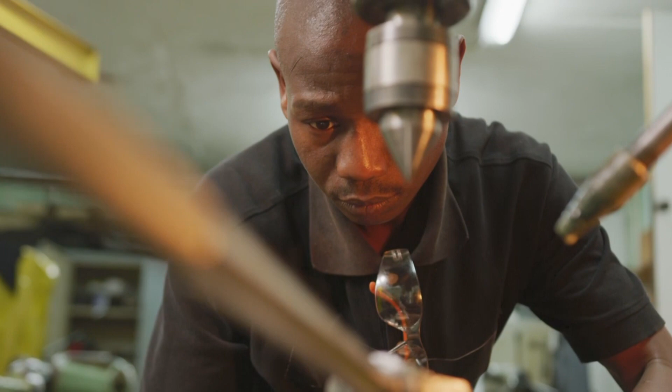For more than 2 centuries, the rules of manufacturing remained remarkably consistent. If you wanted to produce something, you needed a factory.

You needed expensive machinery, specialized tools, production lines, warehouses, and large quantities of raw materials. The economics were simple: the more identical products you manufactured, the lower the cost of each one.

Mass production became the foundation of modern industry, and nations that mastered it became the economic giants of the world.

We know, of course, Nigeria is ensuring that they also key into global development. And for us, we believe we are playing a part in that at Innov8, being a research-to-prototype-based organization.

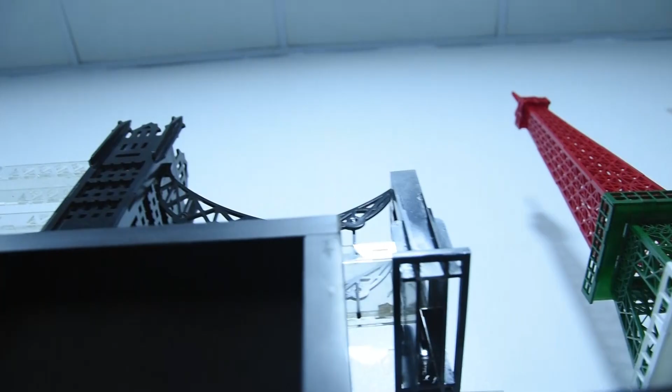This is an avenue to boost our capacity in indigenous development, not having to go outside the shores of Nigeria.

To import equipment, anything that may be needed within the country for manufacturing, for developments in civil engineering, in mechanical engineering and the likes. This ensures that we have the capacity within Nigeria to build this equipment or to build what is necessary.

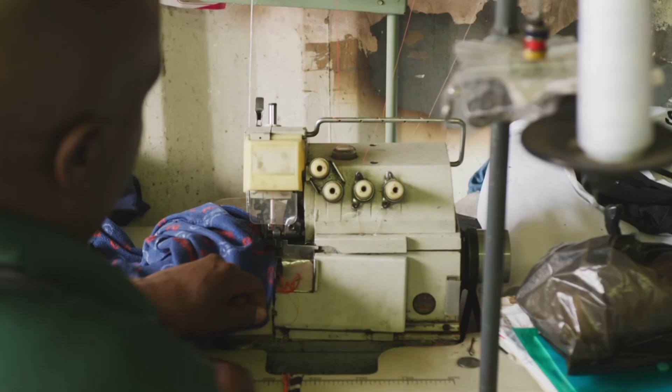From automobiles and aircraft to household appliances and medical equipment, almost everything around us followed this same principle.

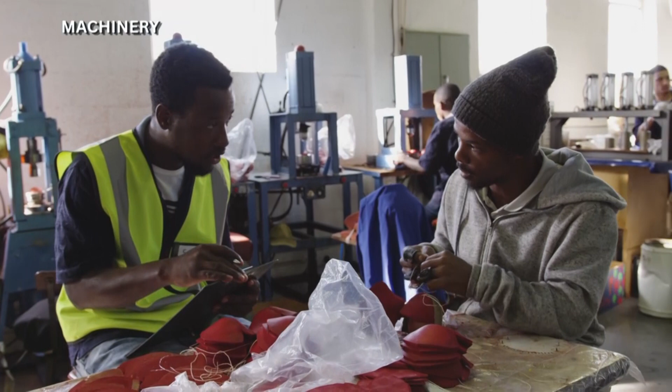Designs were first translated into molds, dies, or specialized machinery before a single product could even be manufactured. Building those tools often cost millions of dollars, meaning innovation itself came with a high price.

Only companies with significant resources could afford to create, test, and manufacture at scale.

For generations, this system worked remarkably well. It gave the world speed, consistency, and affordability. It built industries, created employment, and transformed economies.

Yet, beneath its success lay a quiet limitation. Every new idea demanded new machinery. Every design change required new tools. Every mistake meant wasted materials, lost time, and additional costs.

Manufacturing had become powerful, but it had also become rigid.

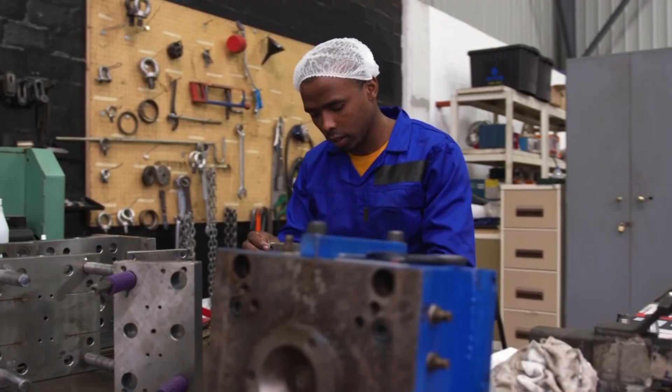Then something unexpected happened. Not inside the world's largest factories, not on the busiest assembly lines, but inside research laboratories, universities, and innovation centers, where engineers began asking a remarkably simple question.

What if objects didn't have to be carved, cut, pressed, or molded into existence? What if they could simply be printed?

For decades, the idea sounded almost impossible. Printing belonged to paper, manufacturing belonged to factories. The two worlds had nothing in common. Until they did.

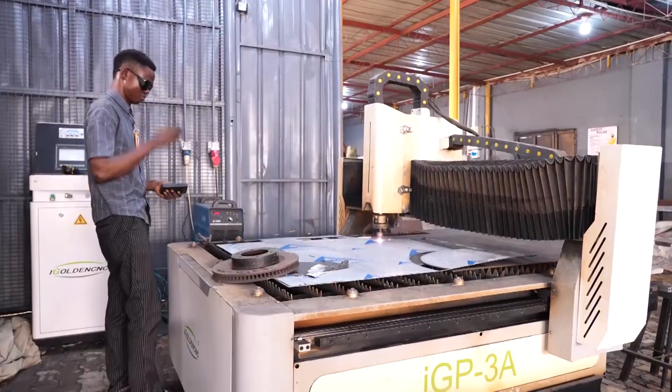What emerged was not merely another machine or another production technique, it was an entirely different philosophy of manufacturing.

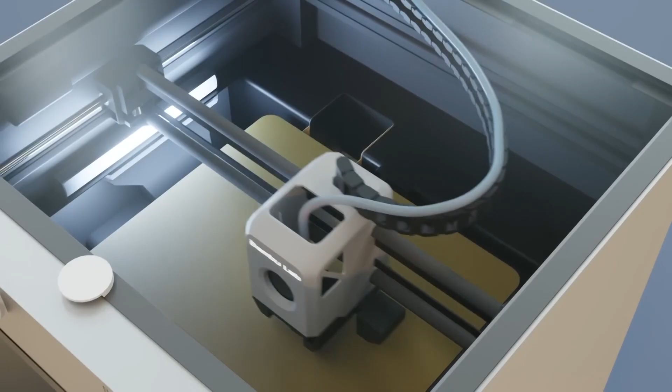Instead of removing material from a larger block or forcing molten material into expensive molds, this new technology would build objects layer by layer, adding material only where it was needed, guided entirely by a digital design.

The world would come to know it as additive manufacturing. Most people simply call it 3D printing.

We normally call it additive manufacturing lab. Yes, because we manufacture component parts, functional prototype, rapid prototyping.

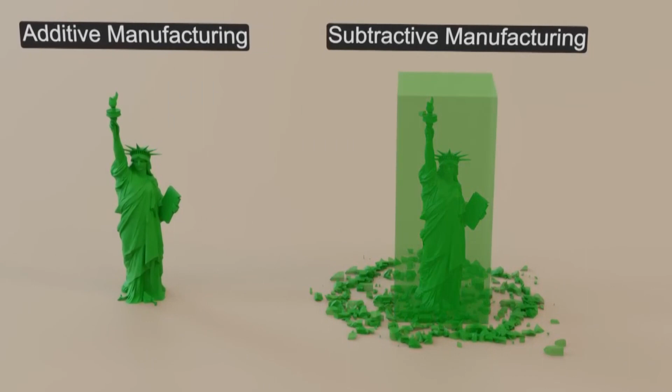Yeah, this is the lab that gives us what we want. First, the client comes with their ideas.

Yes, we'll map the ideas from their head in form of a digital file. That idea that's in your head, you will see it in the computer. Then after which they move to this place.

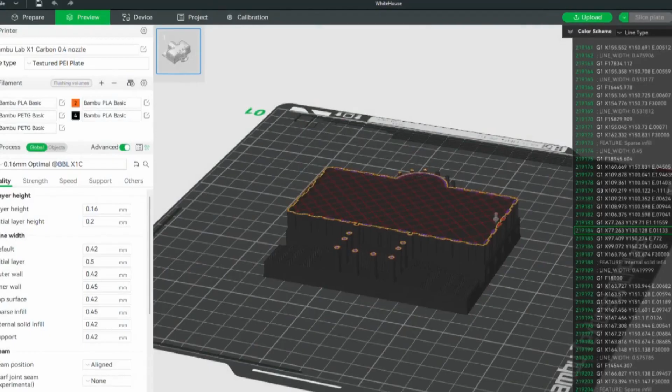From here now we get the file as an STL file, slice it. Slicing it is converting that digital file to G-code. G-code is the language that the machines understand, of course. So converting it into G-code, you slice it. Slicing means you give commands, a set of algorithms. Of course, the computer will now read those algorithms and manufacture exactly what you want to manufacture.

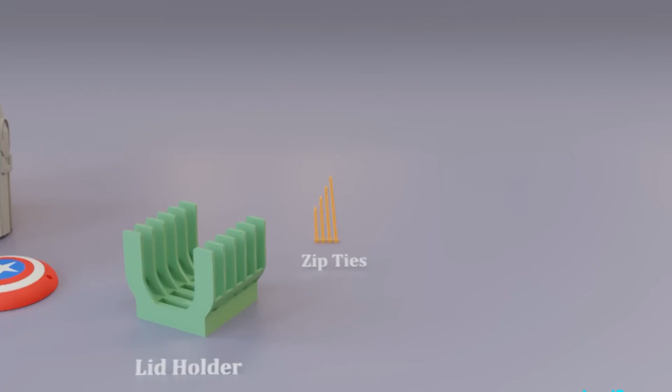Perhaps the biggest misconception about 3D printing is that it's simply another type of printer. It isn't. It represents something much bigger. It changes the relationship between imagination and manufacturing. For the first time in history, having an idea no longer requires owning a factory before you can build it. Yeah, that changes everything. And that everything is already happening.

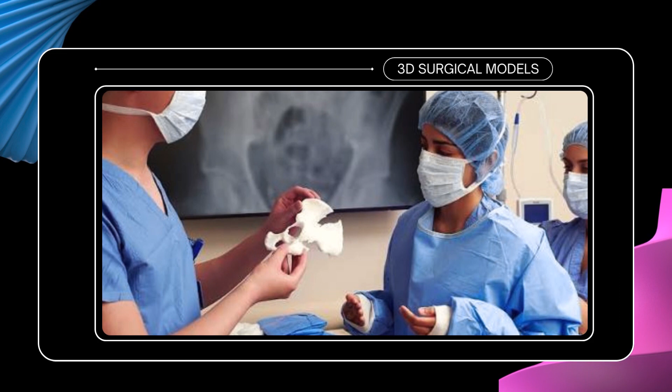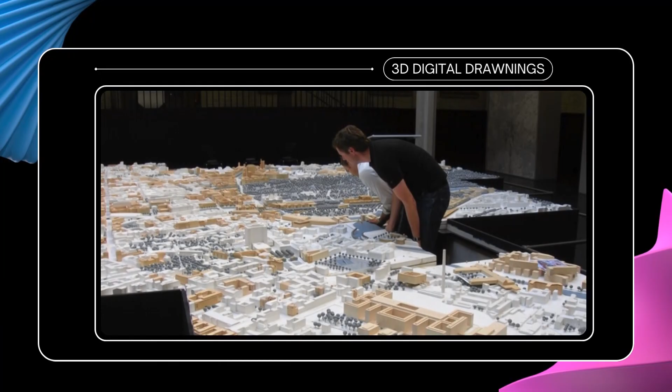Aircraft manufacturers now print lightweight engine components that are stronger than traditionally manufactured parts. Doctors print patient-specific surgical models before entering the operating theater. Dentists produce custom aligners and crowns with astonishing precision. Architects transform digital drawings into physical scale models within hours instead of weeks. Fashion designers experiment with wearable structures impossible to sew by hand. Scientists are developing printable human tissues.

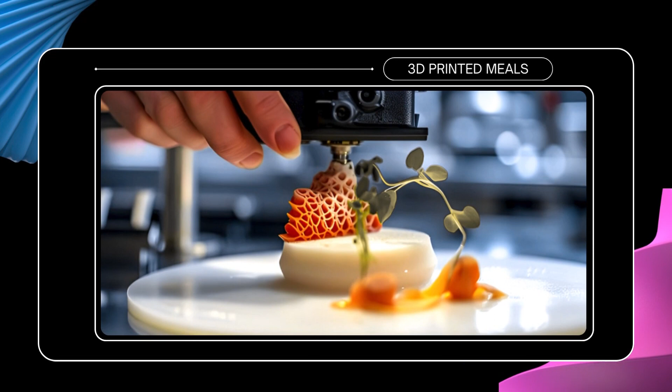Engineers are building homes. Food technologists are experimenting with printed meals. Even space agencies are studying how astronauts could manufacture essential tools millions of kilometers away from Earth instead of waiting for supplies from the ground. This is no longer a technology searching for an application. It is a technology quietly entering almost every industry.

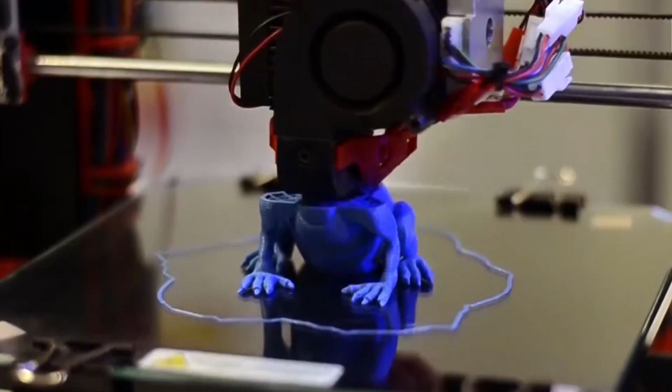Which raises an important question. If countries around the world are redefining manufacturing through additive technologies, where does Nigeria stand in this new industrial revolution? And perhaps more importantly, who is preparing the next generation of Nigerians to become builders of that future? That question brings us here, to a place where ideas are no longer confined to computer screens, but are beginning to take physical form. Innov8 Hub.

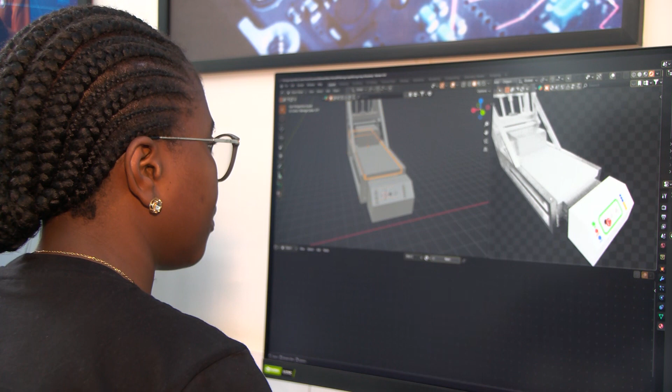Across the world, governments, universities and private institutions are investing heavily in additive manufacturing, not simply because it is new, but because it represents a different way of thinking. They understand that tomorrow's industrial leaders may not necessarily own the largest factories. They will own the brightest ideas, the most advanced digital skills, and the ability to transform those ideas into products faster than ever before. Today, a research idea is not yet real, it's still in the archive, but you can build it to become a reality.

Today's world is professionalism. Today's world is not just academics. Today's world is professionality. Today's world is impact. Today's world is product to impact, research to impact.

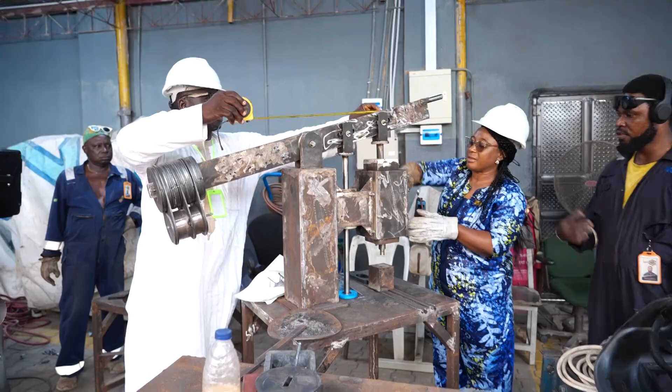That realization is reshaping education itself. Around the world, fabrication laboratories are becoming as important as traditional workshops. Students are no longer encouraged to memorize concepts alone. They are challenged to design, experiment, fail, improve, and build. Because innovation is no longer measured only by knowledge, it is measured by the ability to create.

Here in Abuja, that same philosophy is beginning to take roots. Behind these walls is more than just another innovation center. It is a place where imagination meets engineering, where digital ideas become physical objects, and where young Nigerians are learning that manufacturing is no longer reserved for giant corporations.

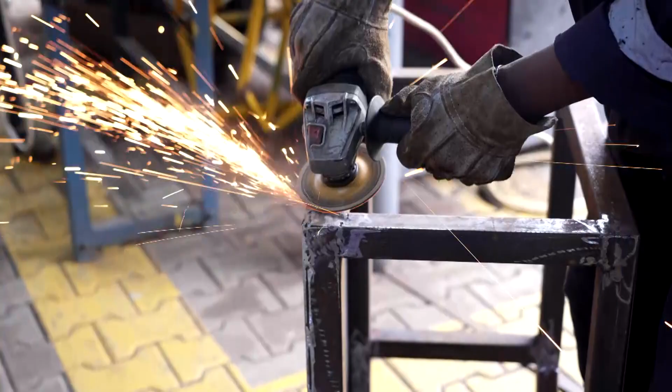This is Innov8 Hub. We act as the bridge between ideas and the market, enabling inventors to test, to iterate, and launch real products that actually solve real problems. Established as one of Nigeria's leading innovation and technology centers, Innov8 Hub was created to nurture a culture of creativity, research, entrepreneurship, and practical problem solving. Rather than simply teaching emerging technologies, the Hub provides innovators with the environment, equipment, mentorship, and collaborative spaces needed to transform ideas into working solutions.

When you go downstairs. Its mission extends beyond technology itself. It is about empowering Nigerians to become creators rather than consumers, equipping them with the skills to compete in an increasingly digital and innovation-driven global economy.

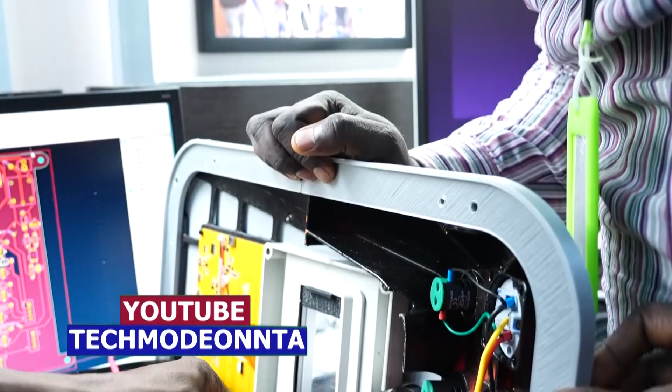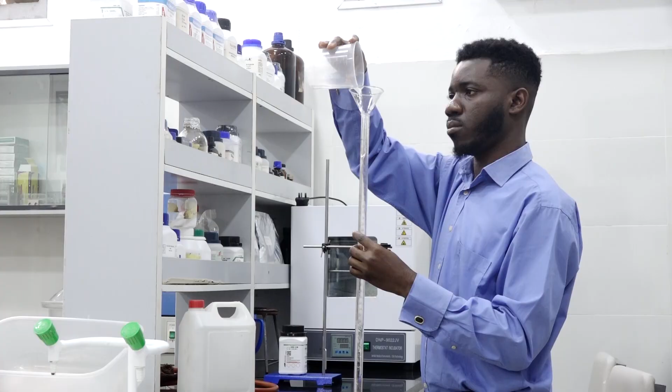Here I've seen tiny whispers of ideas being translated into massive products and prototypes, all by Nigerian experts in all ramifications: IoT, electronics, embedded systems, simulation, product designing, creative media, even upcycling, recycling, and 3D printing technology. You've seen things they've been producing, prototyping, creating out of the hub. We've seen individuals from here who won NASA competitions, and individuals from the hub who won IEEE competitions. These organizations are based in the US.

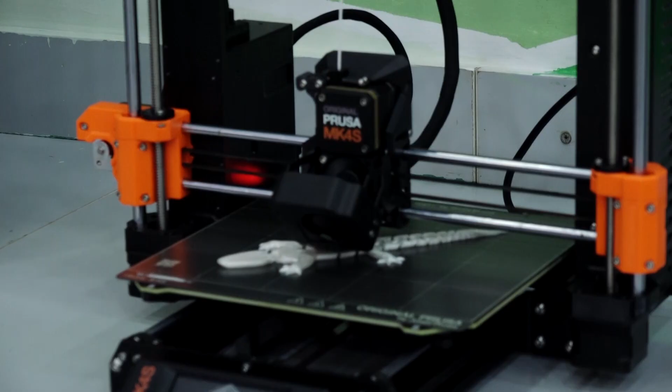Recognizing the growing importance of additive manufacturing, Innov8 Hub has continued to expand its capabilities through strategic international collaborations. One such milestone came from a partnership with the Embassy of the Czech Republic, facilitated under Czech Aid, to establish and strengthen a dedicated 3D printing and fabrication center.

Actually, we get involved through the private sector, concretely through Prusa Research, who already provided his machines to Innov8 Hub before. We were asked to get in touch with them and try to develop collaboration. So that's how I got in touch with the management of Innov8 Hub, and later on I had the opportunity to visit the center myself, the facilities, and I was deeply impressed.

Very much, thank you. Over the years with Prusa, one of the leading 3D printing developers in the world, based in Czech Republic, they've been supplying the 3D printers. We have a partnership with them, and with that we have the 3D printers we use in the lab.

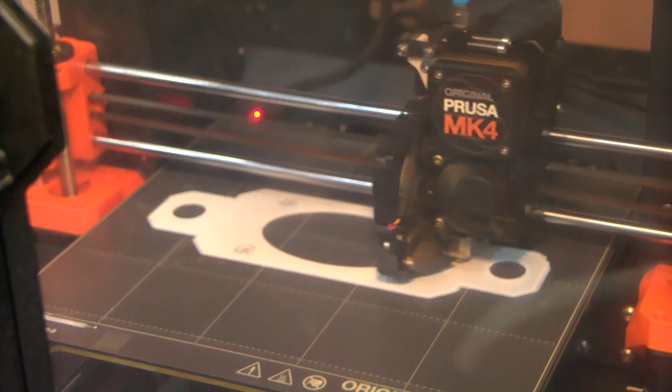As an offshoot of that is also the partnership with the Czech Republic, which is being chaired by the Czech Aid Development Agency, and headed by the Czech Republic Embassy here in Abuja. So this 3D printing program is born out of that partnership to see how we can take emerging technology, and 3D printing is one of it, beyond the scope that it currently exists in Nigeria.

The collaboration represents far more than the donation of equipment. It is an investment in knowledge transfer, technical capacity, and the development of local expertise. It reflects a shared belief that sustainable innovation begins by equipping people with the tools and skills to solve problems for themselves.

From my short experience here as ambassador in Nigeria, I know one thing for sure, that Nigeria on one hand is a country with many challenges, let's be open, but at the same time it's a country with huge potential, and most of this potential lies in its people, especially young people. So to make full use of this potential, it is necessary in the first place to create jobs, highly qualified jobs for those young people, and to diversify the Nigerian economy.

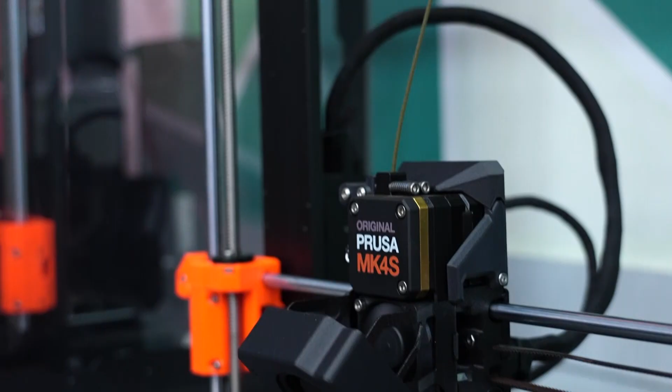I'm sure in the long run Nigeria will succeed in this long project, and for that reason I'm really happy and proud that our government and our embassy could make this small contribution to this long-term goal. I'm sure you will succeed. So good luck and God bless.

International partnerships like this have become increasingly important. Technology evolves at an extraordinary pace, and no nation advances alone. Collaborations enable countries to exchange knowledge, accelerate innovation, and expose young people to global best practices. But machines alone do not transform societies. People do.

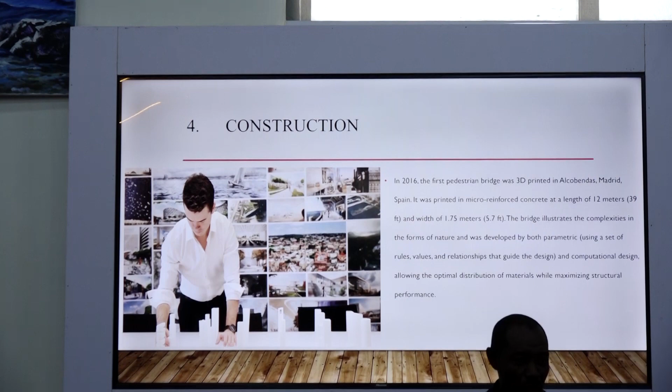That philosophy came to life during the 3D printing and fabrication training program jointly organized by Innov8 Hub and the Czech Embassy. Based on this partnership with the Embassy of Czech Republic in Nigeria, we are going to be training 50 individuals, Nigerians, around 3D printing technology.

Let me speak a little bit about the training and capacity building component of this project. Each cohort will be trained for 3 days. We have segmented the training into 3 arms. First, basic level—because if you don't have knowledge of 3D printing before, you're just aware that it exists, basic will take you from the level of awareness to some knowledge in 3D printing and some ability to print.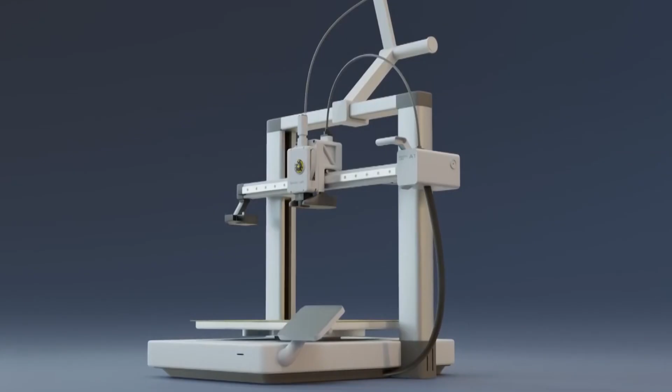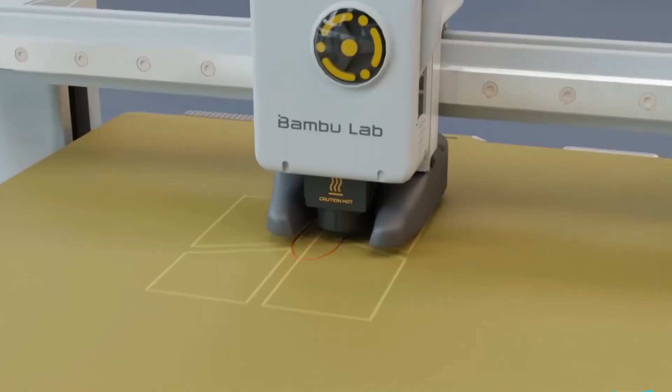The next level is intermediate. After you're at the basic level, you move into the intermediate level, where you can manipulate designs, do little designs on your own, work on the printer, set it up, know how to feed the printer, and do some level of troubleshooting. Then the third segment of this training is advanced. After the intermediate, you move to the advanced level.

Students, researchers, engineers, designers, entrepreneurs, and technology enthusiasts gathered not merely to observe a new machine, but to understand a new way of thinking.

Well, I'm excited about the hands-on training that I will undergo because as a lecturer, the more I'm equipped and skilled, the better for my students and the better for the development of the younger ones. I would say that it is a very good opportunity to be used in my organization to build and make prototypes of different things. In the defense sector of Nigeria, it could be used in so many different ways, in the aerospace, in the maritime, and in land.

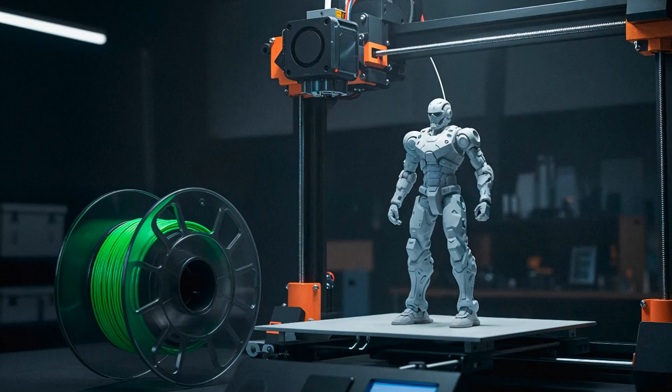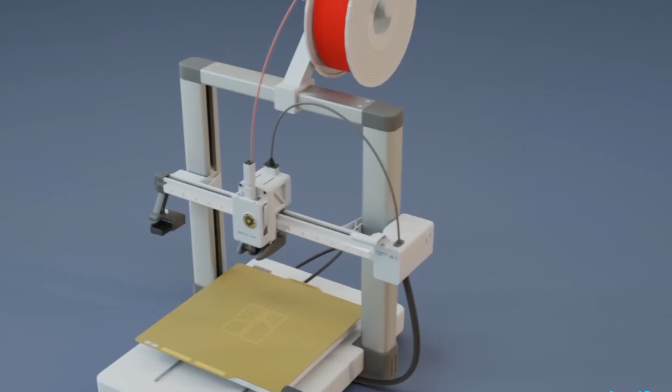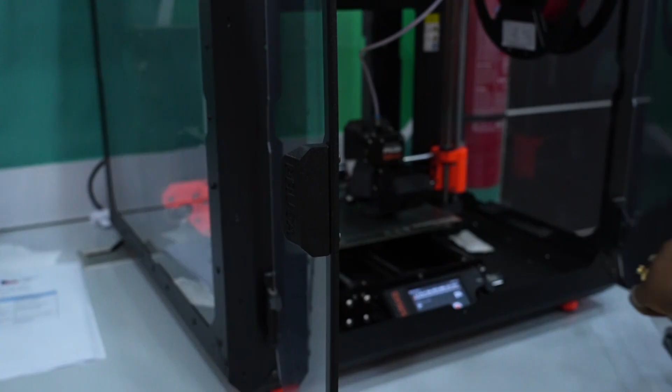Inside the fabrication center, participants explored every stage of the manufacturing process, from digital modeling and computer-aided design to printer calibration, material selection, slicing software, and post-processing techniques. For many, it was their first opportunity to witness a digital concept gradually emerge into a tangible object, layer by layer.

Using 3D printing systems makes it possible that we can replicate parts very easily, and it helps in things we created, making it come to fruition. We make it available. No matter the kind of design we think we want to create, we'll be able to use a 3D machine to make it come into life.

Yes, if you go to universities in the country, you'd find that there are lots of researches that are just packed on shelves as STEM papers, as publications. A place like this breathes life into them because aside from the equipment, it is also a networking hub. This is a space you could come to and be meeting with international organizations, other universities, embassies, and so on.

Yet, perhaps the greatest lesson extended beyond the machines themselves. Participants discovered that innovation is rarely about having access to expensive technology. More often, it begins with curiosity, creativity, and the willingness to solve problems differently.

Being here is the first step, getting knowledge, and then what I intend to do, which is in my field, is teach the students, going back to my university, teaching them from the designing, prototyping, to actually bringing out what they actually want for their project. The first, more like having a working prototype for their projects.

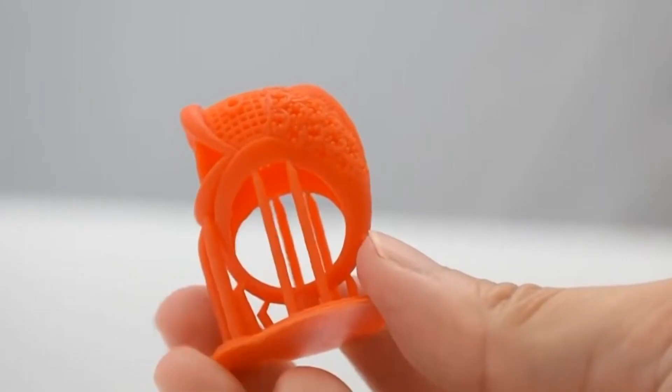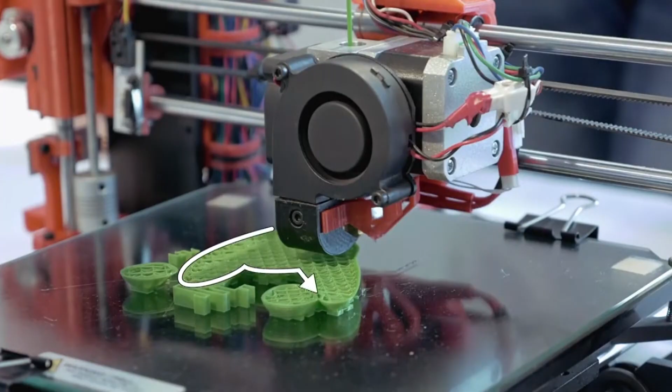Perhaps that is why additive manufacturing is attracting attention far beyond engineering. It is becoming a meeting point where science, art, business, education, healthcare, architecture, and entrepreneurship intersect. It reminds us that innovation is rarely confined to one profession. Instead, it flourishes wherever imagination meets opportunity.

The vision is still alive at Innov8 Hub. It's on our wall when you see it there, the brand wall. The vision is there. As long as we keep this vision alive, we keep the commitment and passion alive at Innov8 Hub to making sure we are impact-driven. We are drivers of impact in the Nigerian society.

And as long as we have these partners we've been working with, and more partners come on board to work with us, in the next 10 years, Innov8 Hub would have been a hub that would have helped Nigeria create jobs. I'm talking of in millions. That would have helped Nigerians become what they envisaged becoming years before Innov8 Hub came into existence.

And in the next 10 years, I'm sure a minimum of 5 unicorns would have been created through individuals that would have worked with Innov8 Hub, worked through any of the programs at Innov8 Hub. I see that happening because now we have a lot of them in the commercialization process, and some have become good businesses. But to become a unicorn is a massive thing. But it's going to happen.

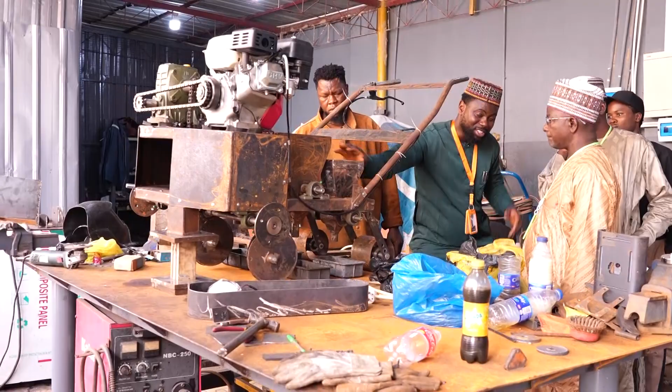Then in the next 10 years, I see the Nigerian academia becoming a champion of innovation, a champion of venture creation, and purveyors of homegrown solutions in Nigeria through the mindset shifting programs that Innov8 Hub is running for members of the academia in partnership with Tech Fund. So far, the impact has been tremendous. But in the next 10 years, the members of the academia would actually be the ones that the industry will look up to for solutions. It used to be like that in Nigeria.